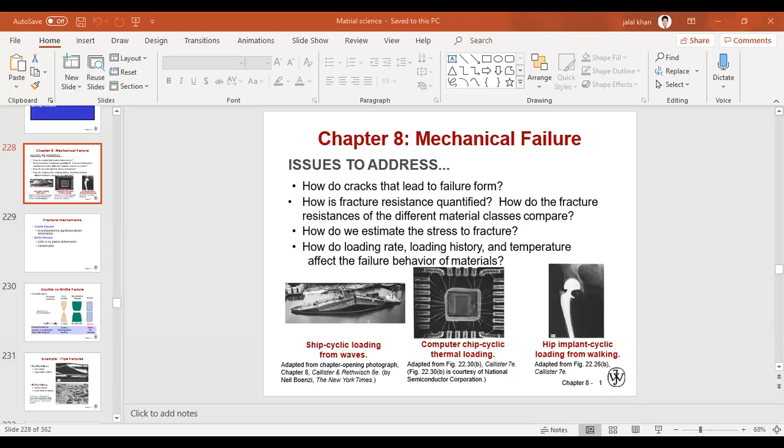Okay, so this is chapter number 8 of the Callister book, and it is about mechanical failure. So when you see this word mechanical failure, what comes to your mind?

I don't have an idea for real. So what do you think about this word failure? Am I audible to you? Yes, but I think we don't have an idea.

Okay, so in general, failure is anything which breaks up, right? For example, if I have this material and I weld it somewhere, and I apply a force or a bending moment to this body, then it will break off at the point of welding. So this is what we call mechanical failure.

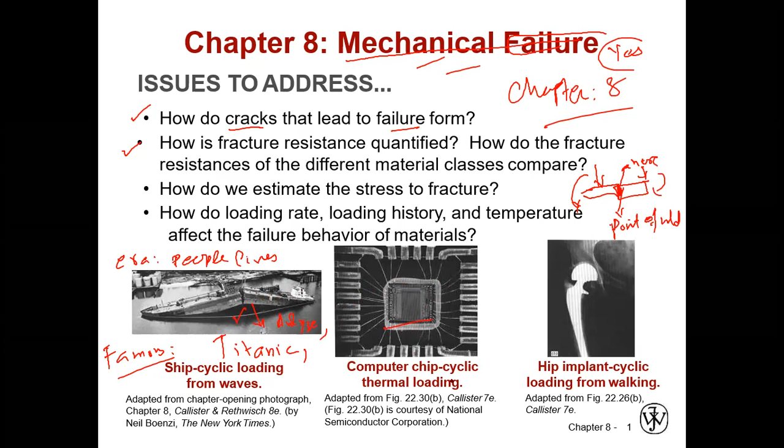Similarly, if you look at this computer chip, it is loaded by a thermal loading. So you have to design and select a suitable material for this chip so that it doesn't melt.

Also, if you look at our legs, when we grow up from child to adult, our bones become strong. They become strong because our body mass is increasing. So in order to resist this load, we need stronger bones. That's why our body has stronger bones when we become adult.

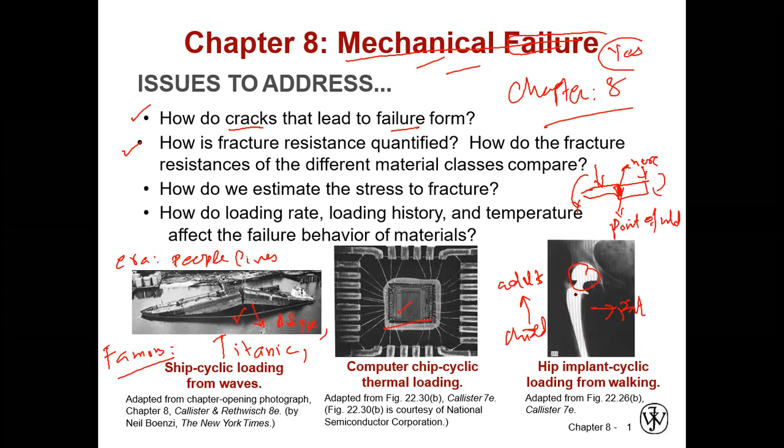Okay, so basically we have two types of fractures: the ductile fracture and the brittle fracture. So do you know about ductile materials and brittle materials?

I think that ductile comes maybe...

Okay, so when you think about ductile materials, like this electrical wire - inside it you have seen the copper wires, right? Similarly, you have seen this disc, like currency, and similarly you have seen the plates formed from copper. So all those materials, from which the wires, the disc, and these plates are made, can be classified as ductile material.

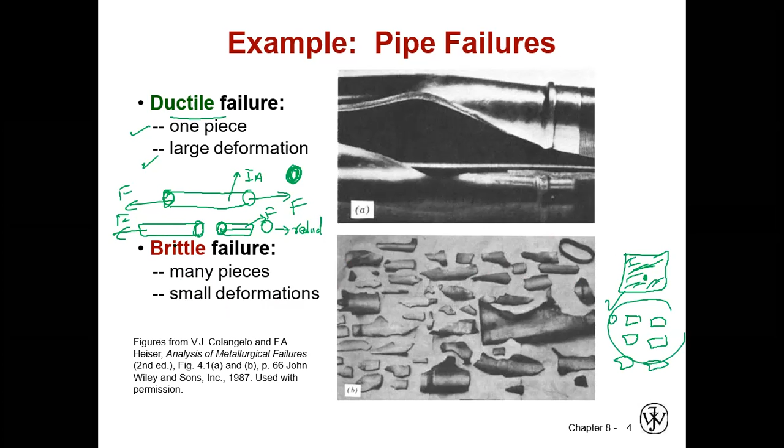So when this specimen breaks into 2 pieces, this is what we call ductile failure. And let's say you have a glass window, and you throw a stone to it - it will break, but it will break into many pieces. If it breaks into many pieces, it will be a brittle failure. Yeah, you are very right. Okay, I get it. And Hamza, are you understanding?

Yeah, it's clear. Okay. Now.

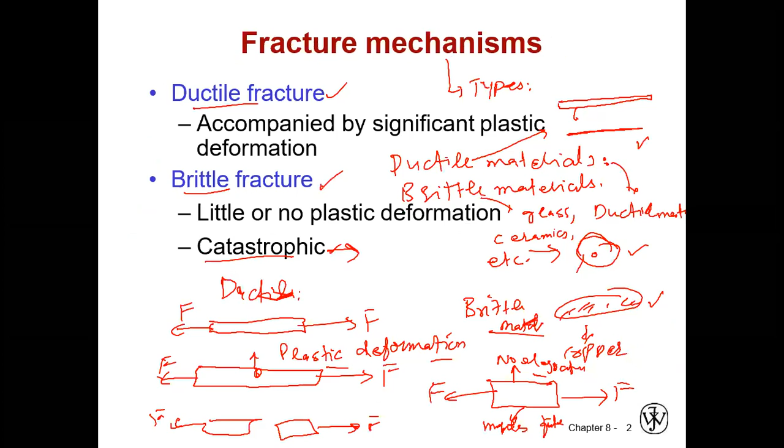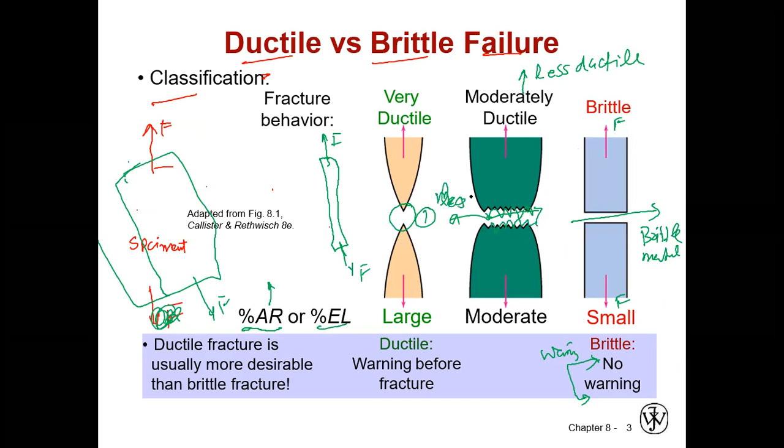So let's say this is a stress, right? Do you know the definition of stress? Stress is basically force per unit area, F over A, and it has a unit of Newton per square meter, or Pascal.

So my question for both of you: what is the difference between pressure and stress? They both have the same units. What's the difference? Can you tell me, Omar? I'm not sure. Hamza, what about you? No idea.

Okay, so let me clear your concept of what stress and pressure are. This is the body, a spherical body, and it is dipped in a container full of water. So the forces that act on its surface, we call F divided by the surface area of this sphere. This is pressure.

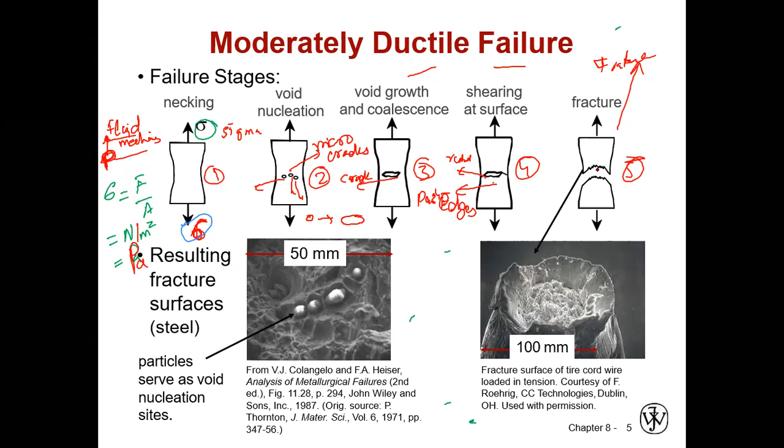Okay, so when we microscopically analyze this surface, this is the zoomed image of it. So when I zoom it up to 1,000 times, then this becomes this, right? Yes.

So we will see that there are some particles that are leading to this fracture, right? Yeah, and this is what we call the nucleation sites. So in the next chapter, the phase diagrams, you will see what is meant by these nucleation sites, right?

Okay, so you mean after breaking, and the small things, it's called nucleation? Yes. So these are basically the particles that are responsible for the failure, right?

Okay, the fracture surface of the tire cord wire in tension. So this is the fracture surface, this is the wire, tire cord, so this is a cord, right? I apply a tensile force, or you can call this a tensile stress.

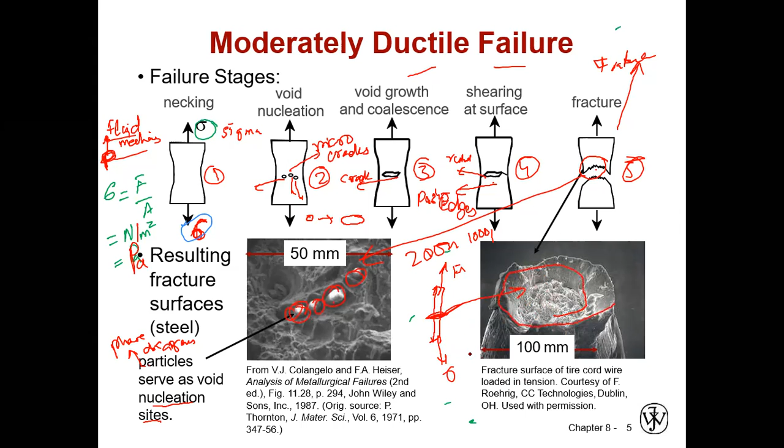So when they are loaded in tension, then they break at this edge, let's say, and this edge is zoomed here, right? So when we see that, it is like a cup and cone shape, right? Do you see that? Okay, so what is the difference between this and this?

The second one is brittle. Okay, okay. So this is the ice cream cone, right?

Right? Yeah, this is the ice cream cone. And you put some ice cream in it, right? So it will become like this.

So this is what we call the cup, and this is the cone, right? So this is the cone, and this is the cup, right? So when this cup and cone structure forms like this, this is what we call

the ductile fracture. And the brittle fracture, there will be no cup and cone shape, right? It will be a straight edge, right? Like this. Okay, so now you understand this slide? Yes, okay, yeah, straight.

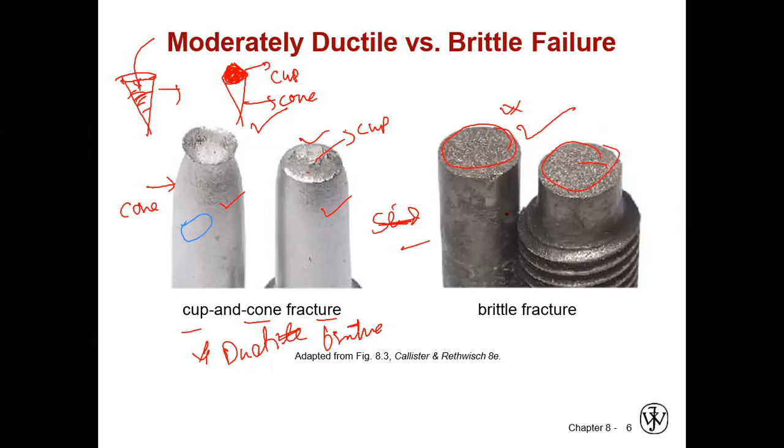And the brittle fracture, right? Okay, so the brittle fracture, basically, if I zoom in, then it is what we call the micro crack.

So in every material, you have to understand this point. In every material, there are micro cracks, right? Every material in the world, right?

So they have some imperfections. You may have studied chapter number 2. Yes, yes, of course. Okay. Chapter number 2, so you have studied the imperfections. I assume that you have studied it, right? Yeah, yeah.

Okay, give me some answers. So this is, are you able to see it? Yeah, the cube. Okay, so what kind of structure is it? What kind of cube is it called? And this particle is in the middle. Can you name this cube? I forget. Okay, so this is the body-centered cube, right?

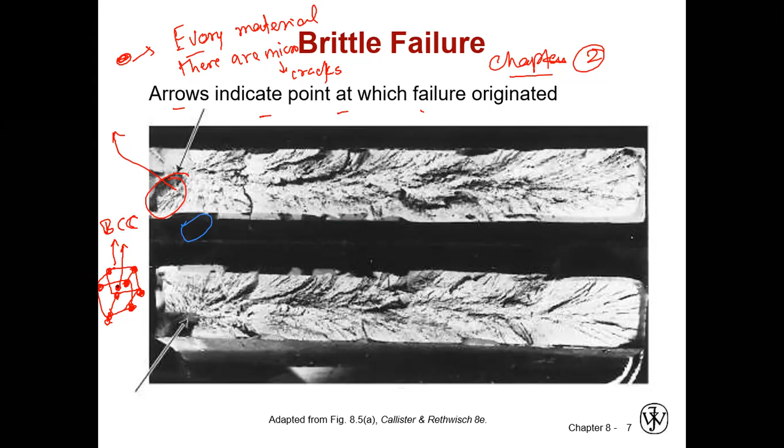BCC, the body centered, BCC, because the one particle is in the middle, right? And this is the simple cubic, and one is the face-centered cube, right? So on the face, if I draw the face of the face-centered cube, then there will be a centered particle, right?

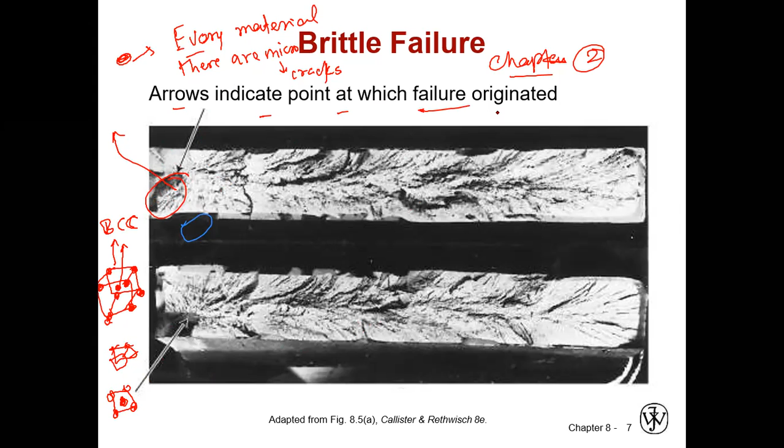Okay, so this was the knowledge from before. So I'm telling you that in brittle material, every material has the micro cracks, and these cracks lead to the failure, right? So from these cracks, the failure originated. Okay, so you also have studied, you also have an idea about the grains and the grain boundaries.

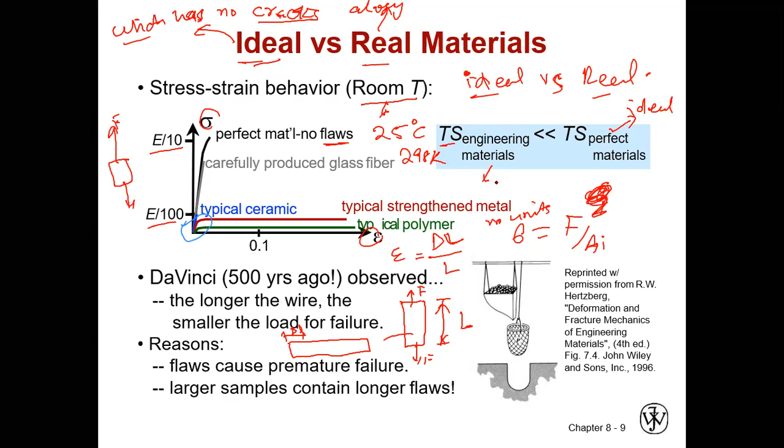Why will it be less? Okay, so in exam, if you are asked why the tensile strength of the engineering material is much less than the perfect materials, how will you answer this? I told you a few minutes ago: because the ideal has no cracks, and real materials always have cracks. So real materials we call the engineering materials, and the ideal material we call the perfect materials.

Okay, so do you hear about DaVinci? No, I didn't hear before. The Mona Lisa painting, have you heard about it? Yes. So the Mona Lisa painting was made by DaVinci. DaVinci was an engineer, he was an artist, he was like everything. So he noticed that the longer the length of the wire, the smaller the load for the failure.

So if you increase the length of the wire, this is the length L, and this is for the second wire, this is the length L dash. So DaVinci, about 500 years ago, he noticed that as you increase the length of the wire, then the load for the failure becomes smaller and smaller.

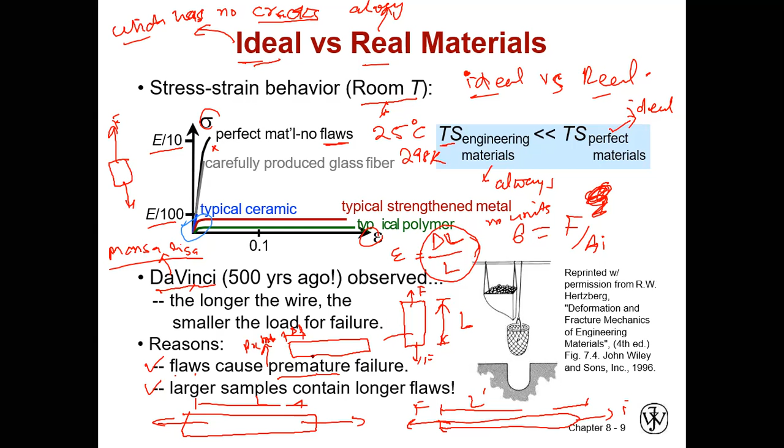So now you understand DaVinci? Yes, I understood. Okay, can you repeat it?

The DaVinci, he said that if there is a long material, less force will make the material break, cracks, the break. And what was the reason for this? Because it's too long. I mean, if it's too long, the less force will break it. And why will the less force be required? Because there are more cracks. More cracks, yes. Okay, so now you understand the DaVinci idea.

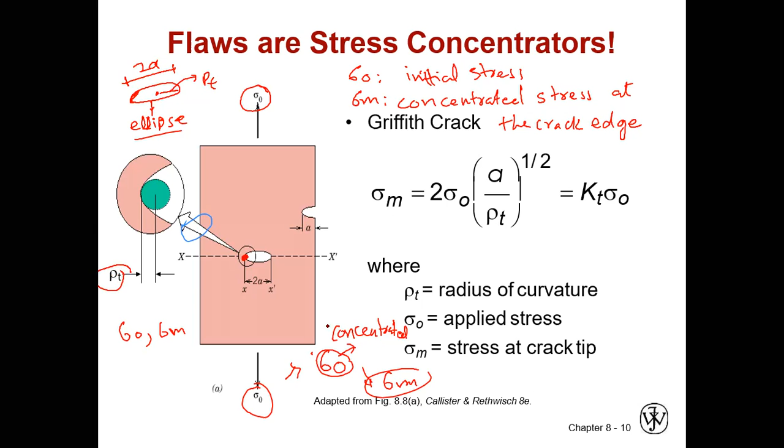So we can write this: sigma m equals 2 times sigma naught times a divided by rho t, to the power of 1 by 2, right?

And we see that rho t is the radius of the curvature, A is the half length of the crack, rho t is the radius of curvature, sigma naught is the applied stress, and sigma m is the stress at the crack tip, right?

So I tell you that this is the concentrated stress, and we can relate it by this mathematical equation. Do you understand this concept of sigma m and sigma naught and how they are both related with the help of this crack length and the radius of curvature to the power of 1/2?

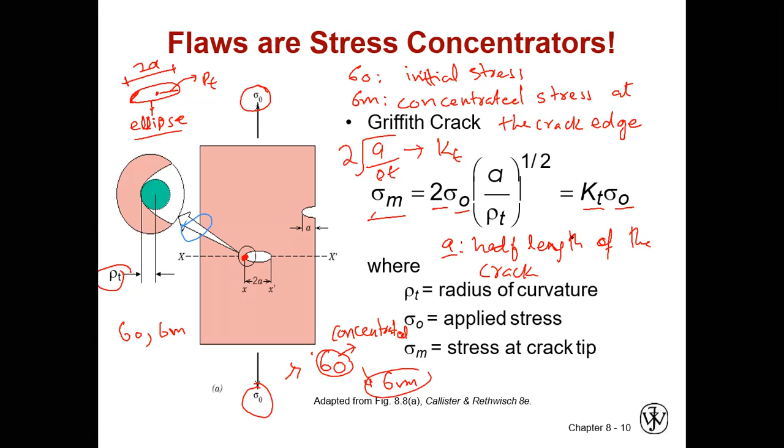So that's how we can relate sigma m with sigma naught. On this figure, we derived this equation: sigma m equals sigma naught times square root of A divided by rho t. And we can write this term as kt, so it is kt sigma naught.

So if I plot this stress near this tip edge, when this force reaches here, it will grow up like a parabola. And at this tip, it will become longer and longer, and it will go to sigma m. So remember, sigma m is always greater than sigma naught.

That is what we call the concentrated. Sigma naught is the initial. You can assume that at this point it is sigma naught, and at this point it is sigma m, and they both have a parabolic or exponential relationship. They are exponentially increasing. So this is sigma naught, and when I reach this crack point, this is sigma m.

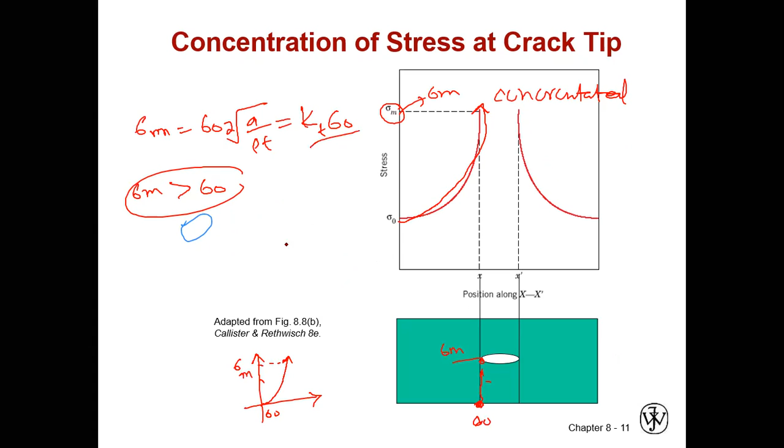On both sides, this is basically plotted here. And this kt, we derived this equation: sigma m equals kt sigma naught. So if I solve for kt, then kt equals sigma m divided by sigma naught.

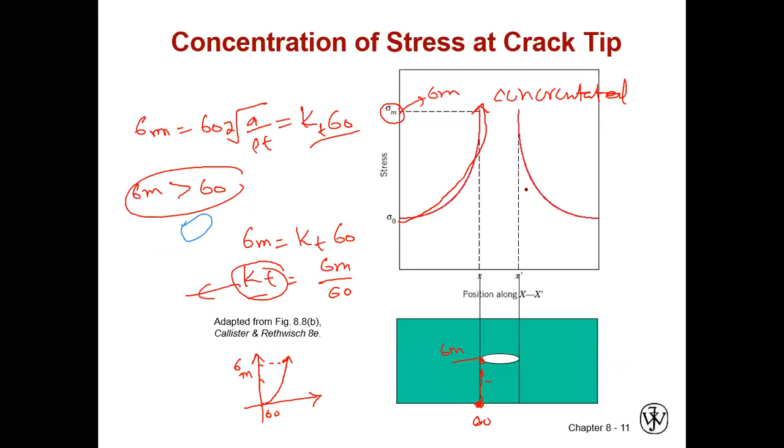Okay, so in tomorrow's lecture, inshallah, we will study this crack propagation, right?

Is there a question we can solve by equation? Yes. Let me try to give you some problems from these equations, is there any question? Yes, please, just to be clear. One time I have to plug in my battery charger, one minute, okay.